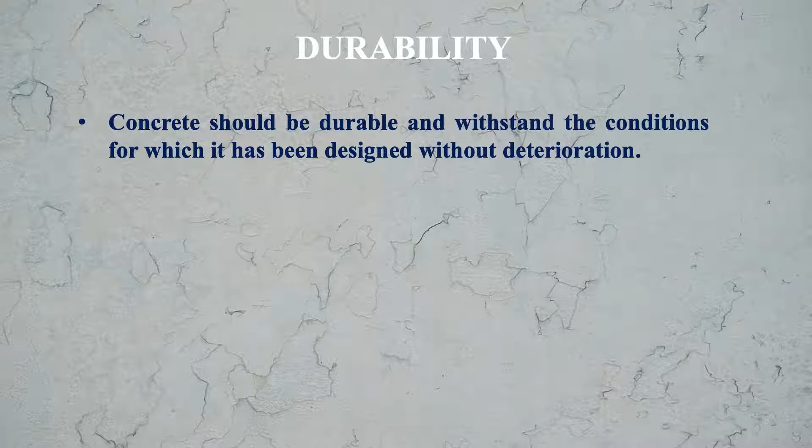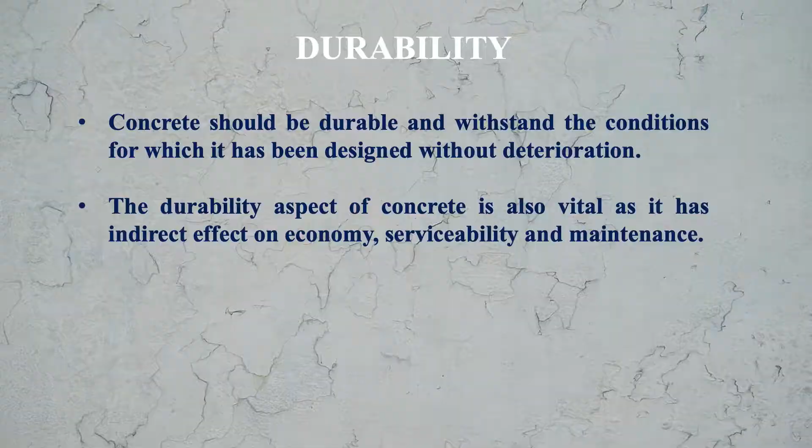what is the importance of durability. Concrete should be durable and withstand the conditions for which it has been designed without deterioration. The durability aspect of concrete is also vital, as it has an indirect effect on economy, serviceability and maintenance. So these are the reasons why the concrete we use for construction should be durable.

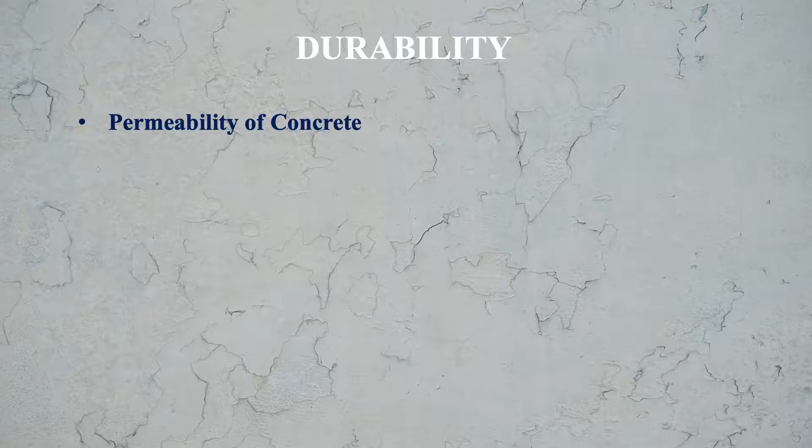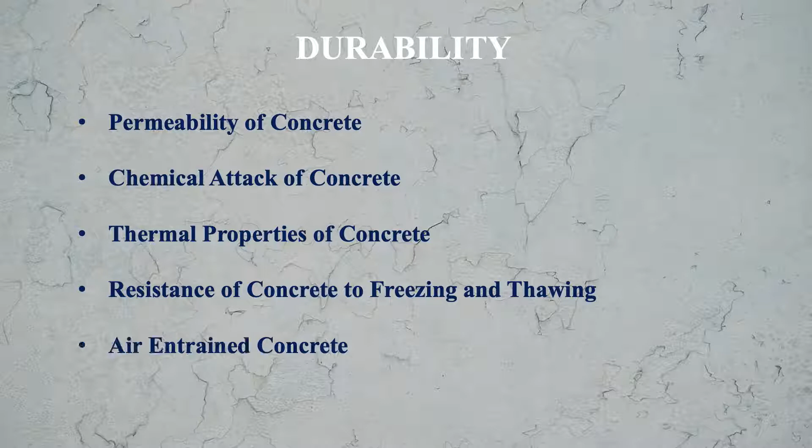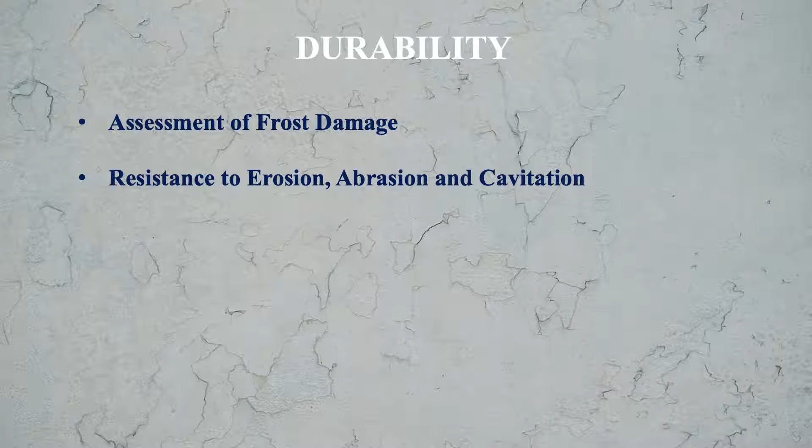We will learn about durability through the following factors: first is permeability of concrete, chemical attack on concrete, then thermal properties of concrete, then resistance of concrete to freezing and thawing, then air entrained concrete, assessment of frost damage, resistance to erosion, abrasion and cavitation, and cracks in concrete. So all these factors will decide how durable the concrete is.

Out of these, we will be focusing our discussion on the first three, that is permeability of concrete, chemical attack on concrete and thermal properties of concrete. So first of all, let us see what are the factors affecting the durability.

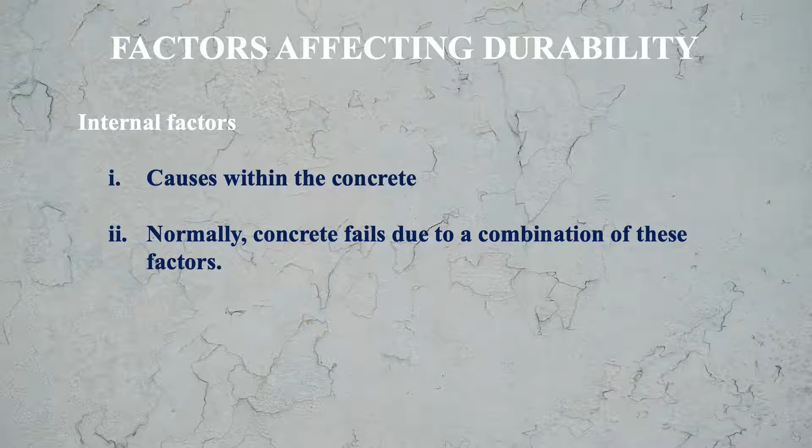There are external factors as well as internal factors. External factors means the environmental factors, and internal factors means those that cause deterioration within the concrete. Normally concrete fails due to a combination of these factors. Let us see what are the external factors or the environmental factors.

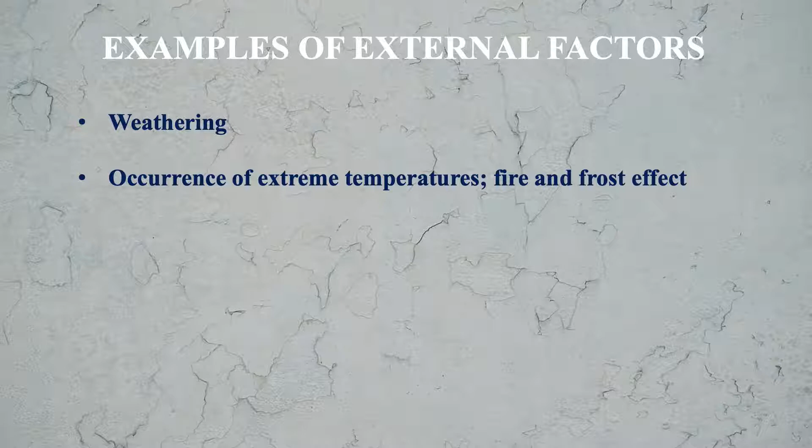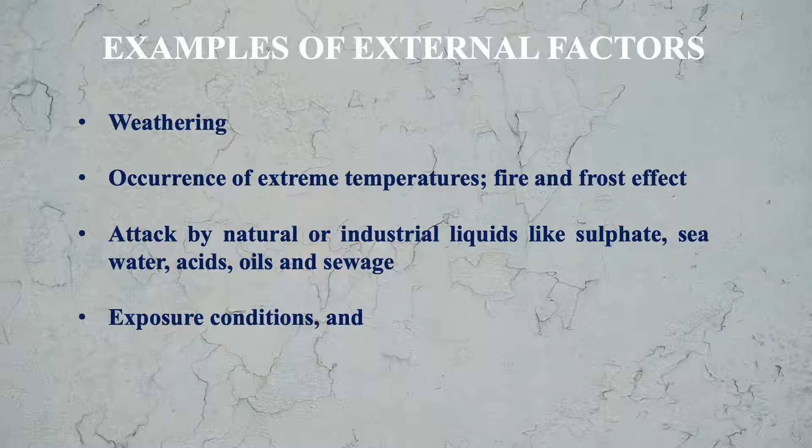External factors include physical factors, chemical factors and mechanical factors. Examples of external factors are weathering, occurrence of extreme temperatures, fire and frost effect, attack by natural or industrial liquids like sulfate, seawater, acids, oils and sewage, exposure conditions, and finally abrasion and cavitation. So these are the external factors affecting the durability of concrete.

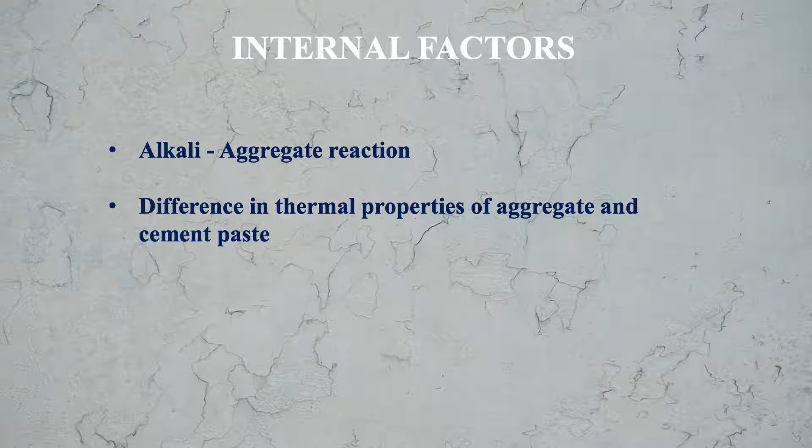As far as internal factors are concerned, these occur within the concrete, so we have to focus on what is occurring within the concrete, with no external agency playing any role. These internal factors are alkali aggregate reaction, difference in thermal properties of aggregate and cement paste, and permeability of concrete. So these are the three internal factors.

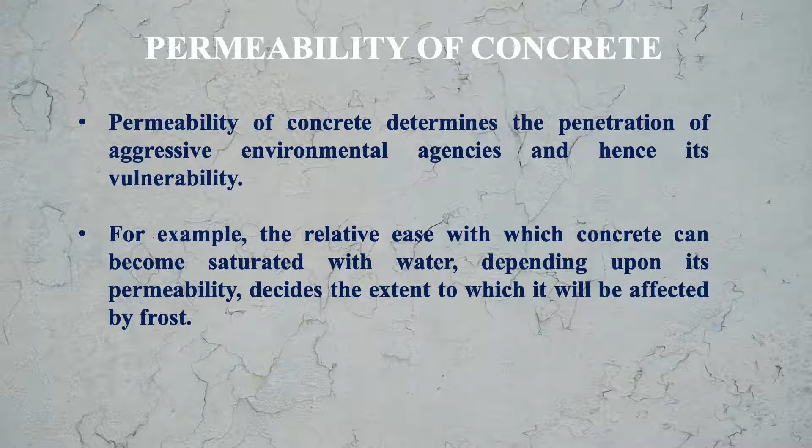Let us begin with permeability of concrete. Permeability of concrete determines the penetration of aggressive environmental agencies and hence its vulnerability to the aggressive environment. For example, the relative ease with which concrete can become saturated with water, depending upon its permeability, decides the extent to which it will be affected by frost.

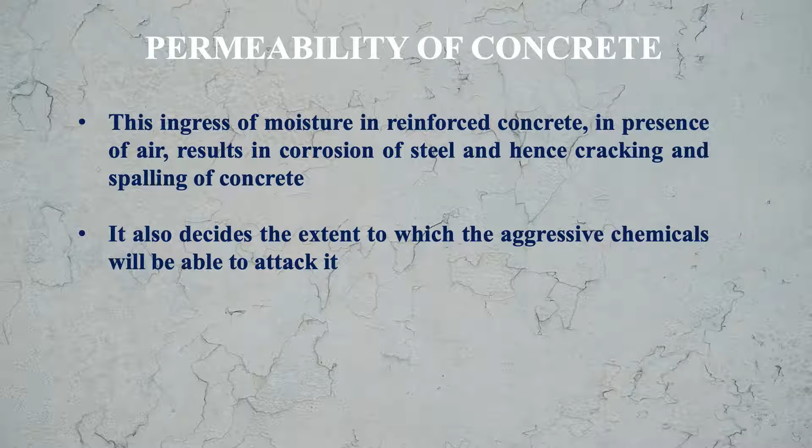This ingress of moisture in reinforced concrete in presence of air results in corrosion of steel and hence cracking and spalling of concrete occurs. It also decides the extent to which aggressive chemicals will be able to attack it. The permeability of concrete is also of great importance in relation to water tightness of liquid retaining structures, roofs and toilets which are in touch with moisture or water.

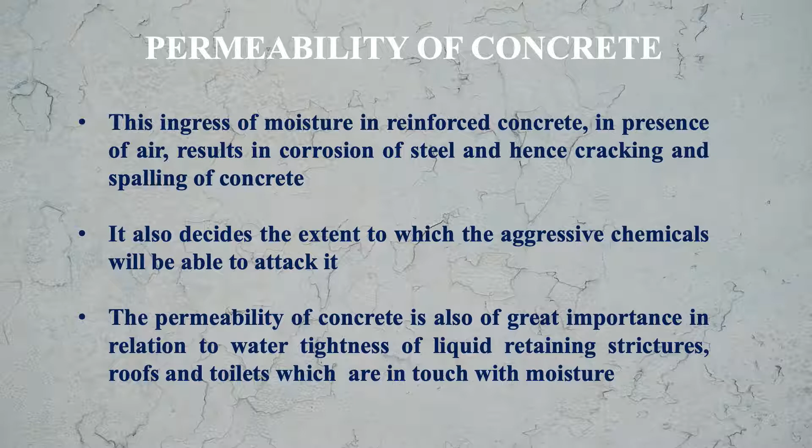Hydrated cement paste consists of gel pores and capillary cavities, meaning it has two types of voids. If we focus on gel, it has a porosity of 28.9%, but its pores are so small that an appreciable amount of water cannot pass through them. So gel pores do not contribute to the permeability of concrete.

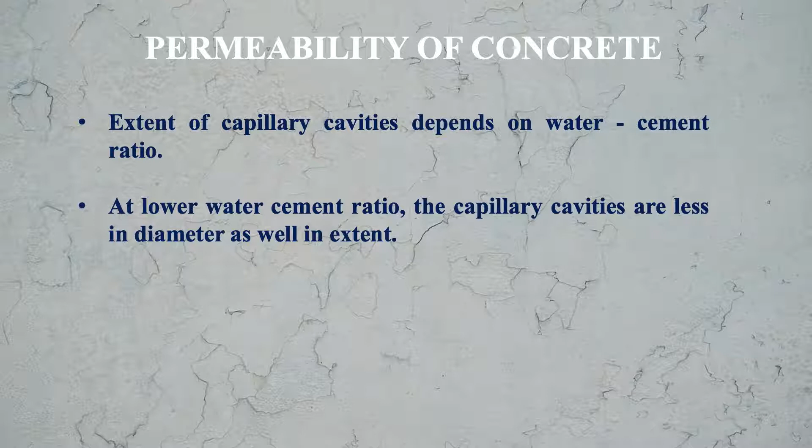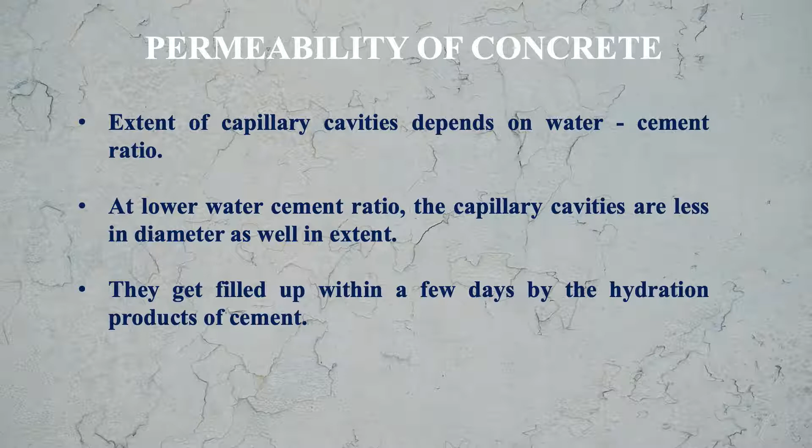The extent of capillary cavities depends on the water cement ratio. At lower water cement ratio, the capillary cavities are less in diameter as well as in extent, and they get filled up within a few days by the hydration products of cement. On the other hand, due to higher water cement ratio, meaning more than 0.7, large cavities are formed which gel is unable to fill, and they remain empty and are responsible for the permeability of concrete.

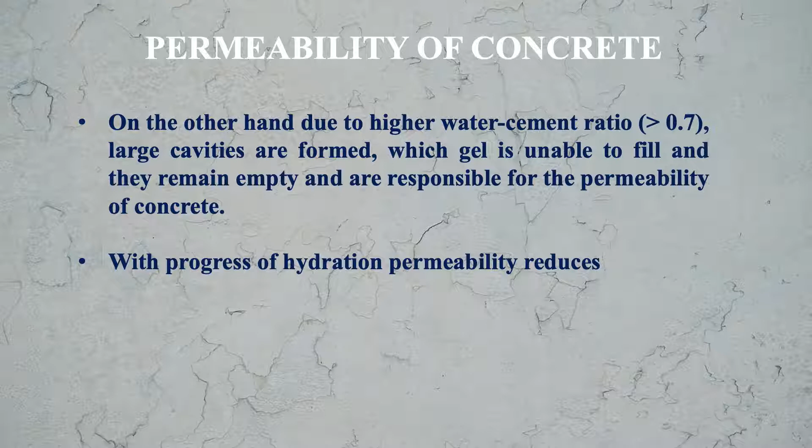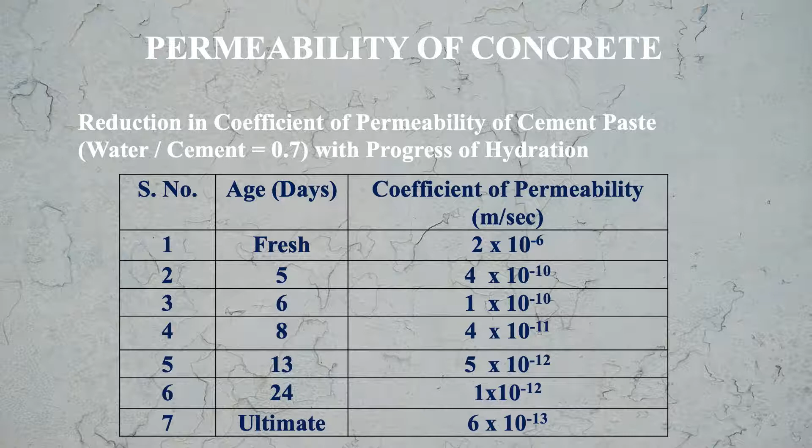The value of coefficient of permeability, as you saw, even at 8 days is 4 into 10 to the power minus 11 meter per second, and it is so small, comparable to a rock like granite — that is, physically no water will penetrate through it.

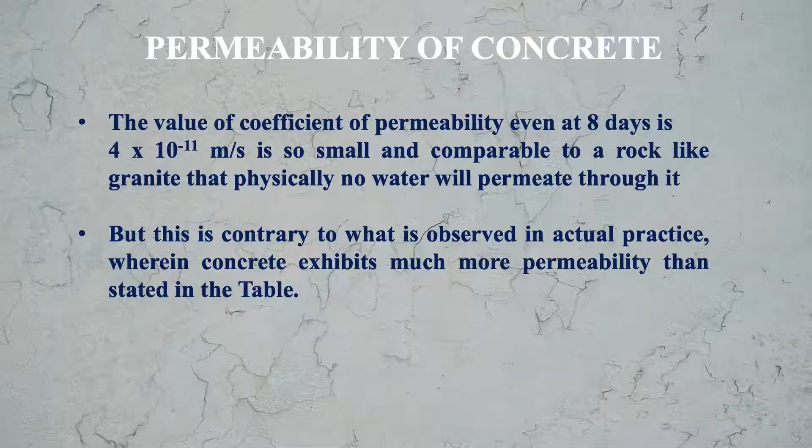But this is contrary to what is observed in actual practice. In actual practice, concrete exhibits much more permeability than stated in this table. So what are the reasons for that? We saw that with age the permeability is decreasing, and at 8 days it is almost comparable to the permeability of a rock like granite. So where is this permeability in the concrete coming from?

Let us see the causes of permeability. The causes of permeability include formation of micro cracks due to long-term drying shrinkage.

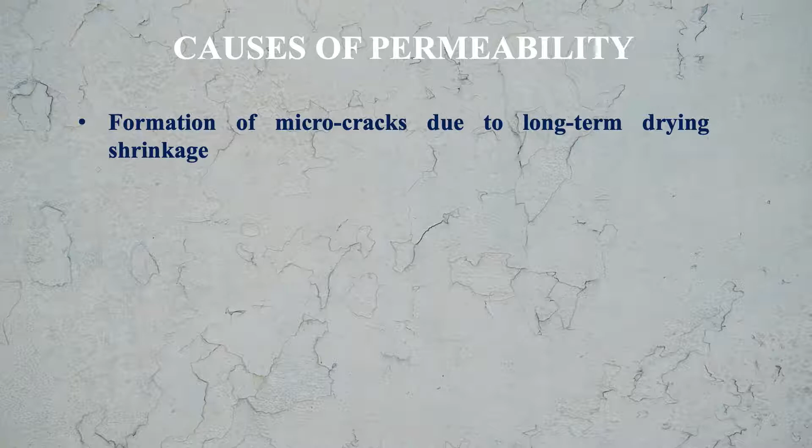Also, rupture of bond between the interface of paste and aggregate, due to differential thermal stresses, will cause permeability. Cracks developed on account of structural stresses will also cause permeability in concrete.

Entrapped air due to insufficient compaction also causes permeability, and volume change in concrete on account of various other reasons also causes permeability in concrete.

Now let us see the different methods for improving impermeability of concrete. One method is that we can use pozzolanic materials — the leaching of calcium hydroxide is prevented by this, and hence porosity is controlled when we use the pozzolanic material.

Second method is air entrainment up to 6%. If we do air entrainment in concrete up to 6%, we can control the impermeability, or improve the impermeability of the concrete.

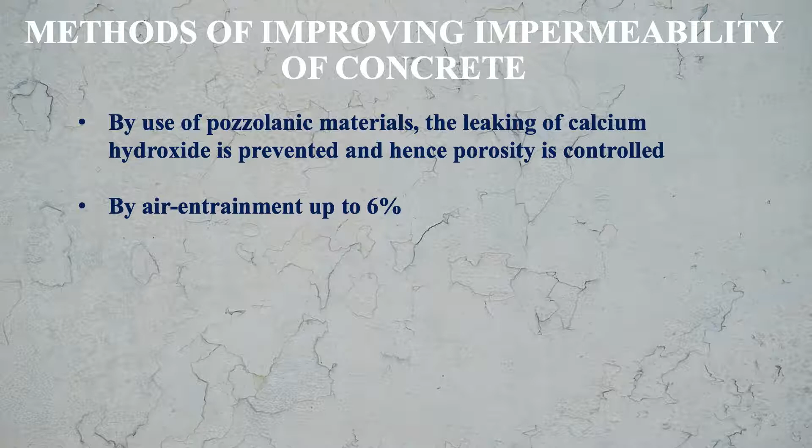Another method is high pressure steam cured concrete. This exhibits better impermeability due to coarser gel and hence lower drying shrinkage, so we can get good impermeable concrete.

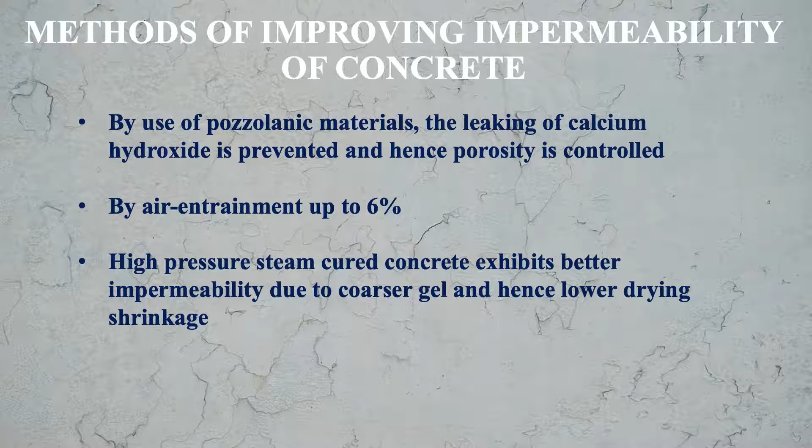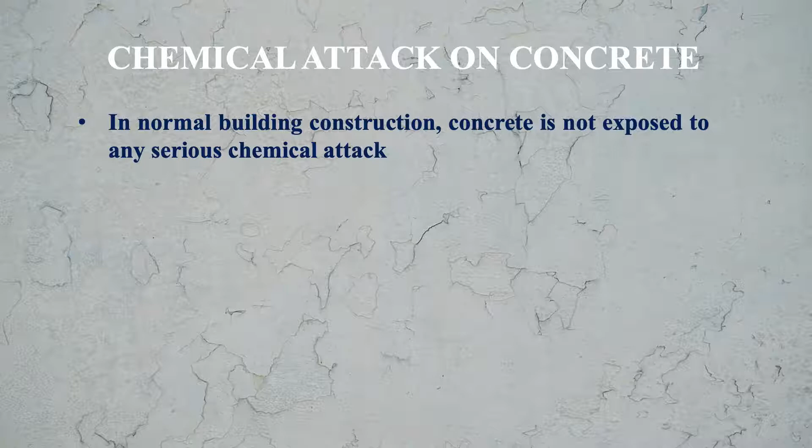Now let us see the chemical attack on concrete — how chemicals affect the durability of concrete. In normal building construction, concrete is not exposed to any serious chemical attack, considering general building construction.

But in certain special situations, concrete is exposed to chemical attack to different degrees, such as structures in sea, sulfate infested soils, tanneries where leather work is done, and industries producing, handling and storing chemicals. So in these situations, concrete is exposed to chemical attack.

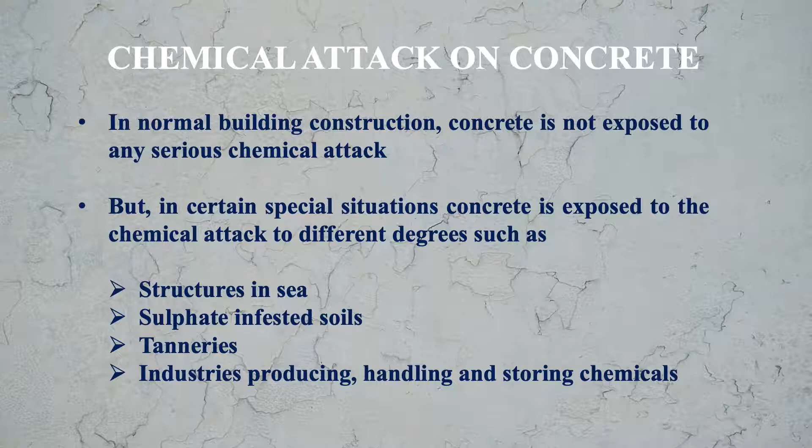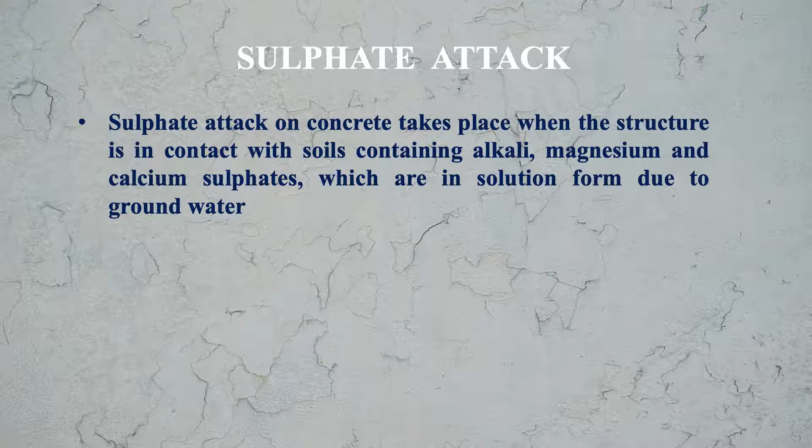Out of different chemical attacks, let us first consider the sulfate attack. Sulfate attack on concrete takes place when the structure is in contact with soils containing alkali, magnesium and calcium sulfates, which are in solution form due to groundwater.

When these chemicals come in contact with groundwater, they form a solution of these chemicals, and due to this, our concrete is affected.

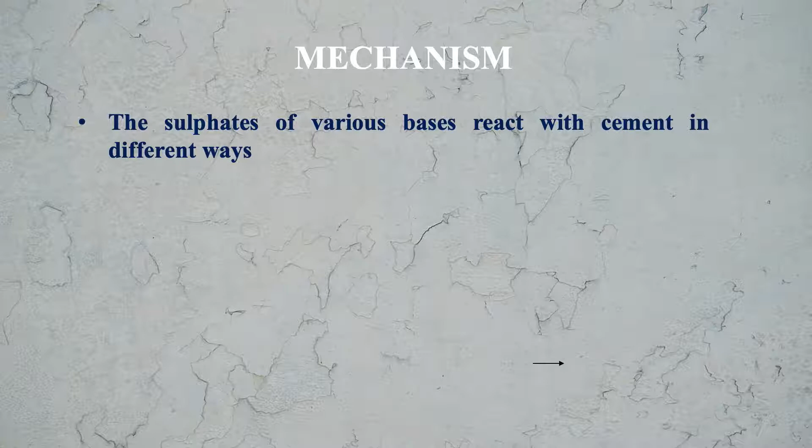So let us understand the mechanism of sulfate attack. The sulfates of various bases react with cement in different ways. Sodium, potassium and ammonium sulfates first react with calcium hydroxide to form gypsum, which in turn reacts with hydrated calcium aluminates to form calcium sulfoaluminate.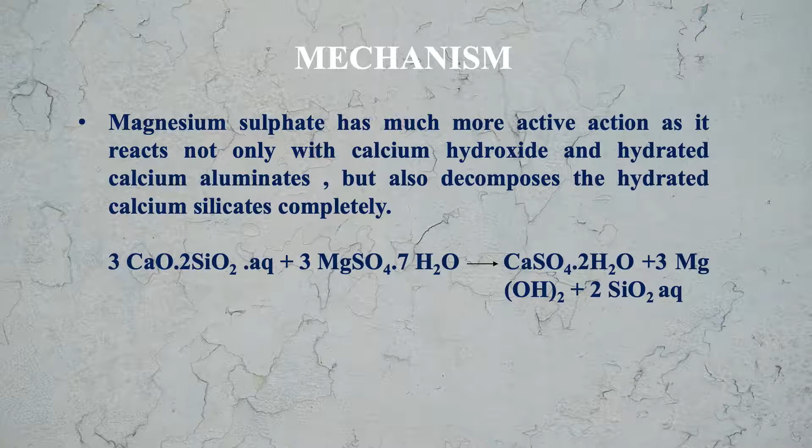So that way you see that by the attack of these sulfates, the hydrated components of the cement are changing their chemical nature. Because of that, deterioration is taking place.

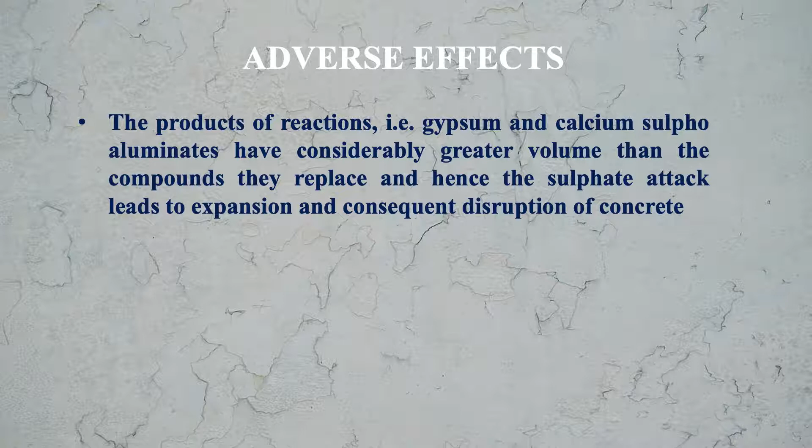Now let us see the adverse effects of the sulfate attack. The products of reaction, that is gypsum and calcium sulfoaluminates, have considerably greater volume than the compounds they replace, and hence sulfate attack leads to expansion in the concrete, and consequently disruption or deterioration of concrete occurs.

In case of magnesium sulfate, because of the very low solubility of magnesium hydroxide, the reaction proceeds to completion and hence is very severe compared to other sulfate attacks. The effect of magnesium sulfate is more severe in comparison to other sulfate attacks.

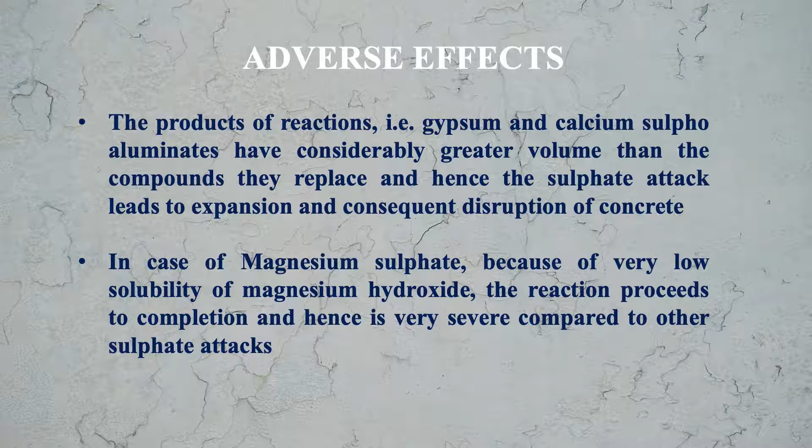Also, the rate of sulfate attack increases with the increase in the strength of the solution. As the strength of the solution of these sulfate compounds increases, the attack on the concrete will increase.

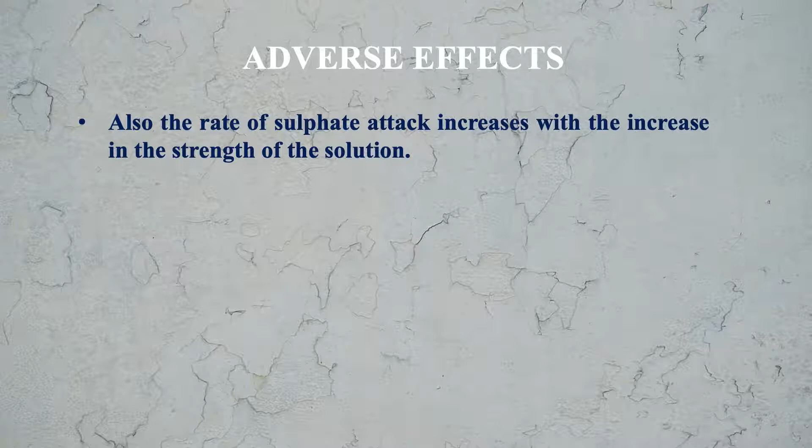A saturated solution of magnesium sulfate can cause serious damage to concrete with higher water cement ratio in a relatively short time, while lower water cement ratio concrete can withstand this attack for 2 to 3 years. So that is the effect of water cement ratio: at higher water cement ratio, it attacks more quickly compared to when the water cement ratio is low.

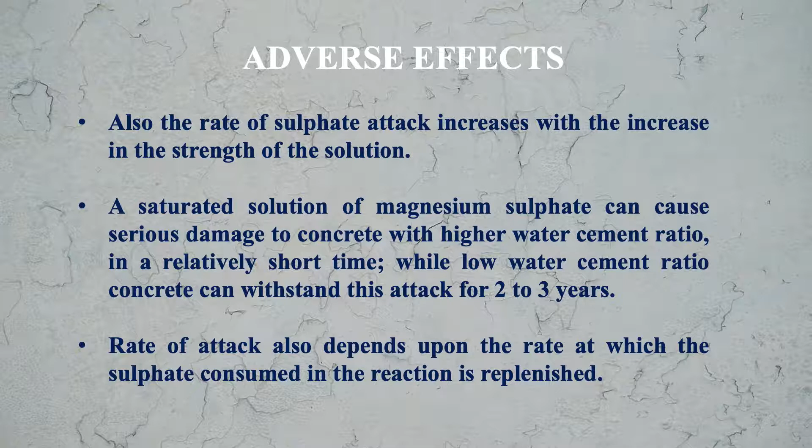The rate of attack also depends upon the rate at which the sulfate consumed in the reaction is replenished. If the sulfate consumed in the reaction is being replenished, then the rate of attack will be more. If it is being replenished slowly, the attack of sulfate will be slow.

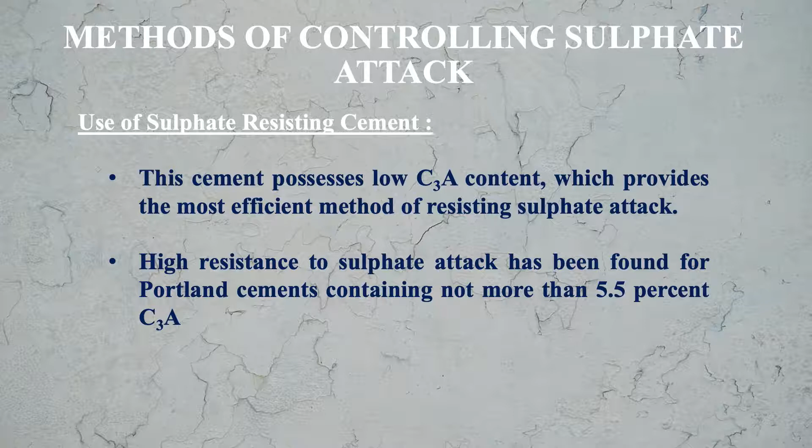So let us see how we can control the sulfate attack. There are different methods. First, we can control it by using sulfate resisting cement. This cement possesses low C3A content, tricalcium aluminate, which provides the most efficient method of resisting sulfate attack. High resistance to sulfate attack has been found for Portland cements containing not more than 5.5% of C3A.

We can also control the sulfate attack by using quality concrete. If we use well-designed, mixed, placed and compacted concrete, we get a dense concrete, and this concrete will be impermeable, and would exhibit higher resistance to sulfate attack. For getting a dense concrete, the concrete must have a low water cement ratio. So by using quality concrete, we can check the sulfate attack on the concrete.

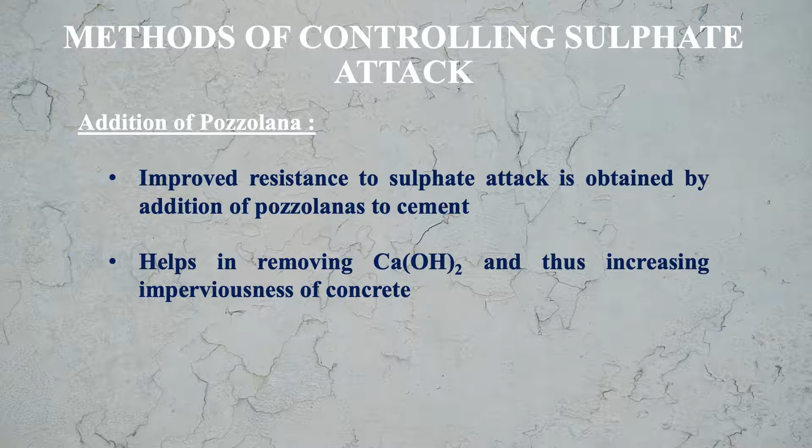We can improve the resistance to sulfate attack of concrete by adding pozzolanic material. Using pozzolanic material gives improved resistance to sulfate attack, obtained by addition of pozzolanas to the cement. This helps in removing calcium hydroxide and thus increasing imperviousness of concrete.

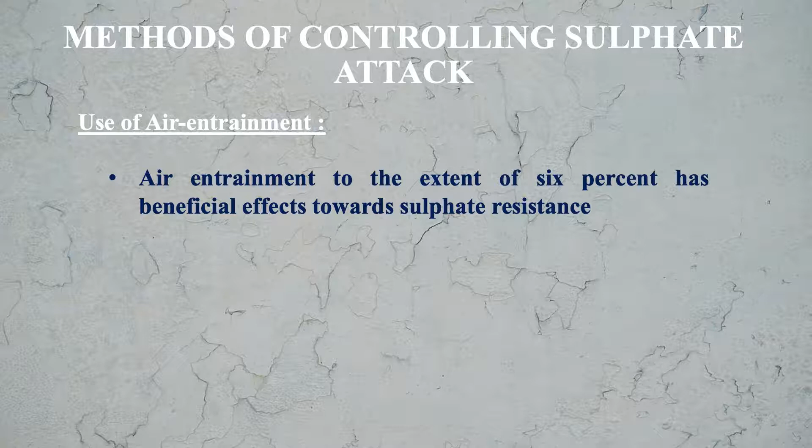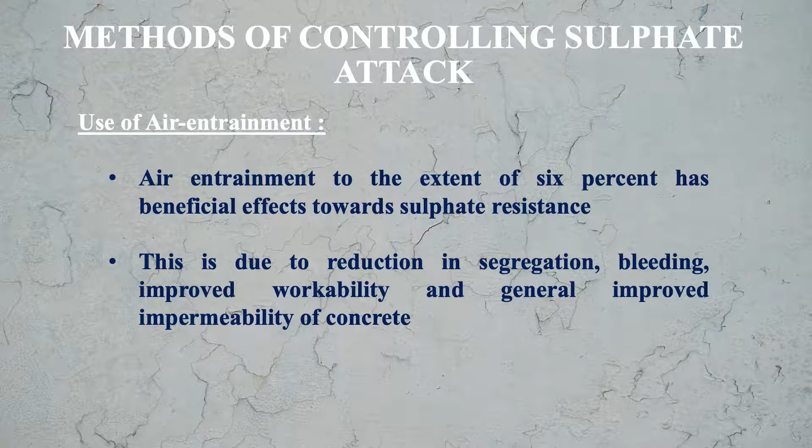Also, we can use the air entrainment method. Air entrainment to the extent of 6% has beneficial effects towards sulfate resistance. This is due to reduction in segregation, bleeding, improved workability, and general improved impermeability of the concrete. Because of the improvement in these properties, air entrainment helps us increase the resistance of concrete to sulfate attack.

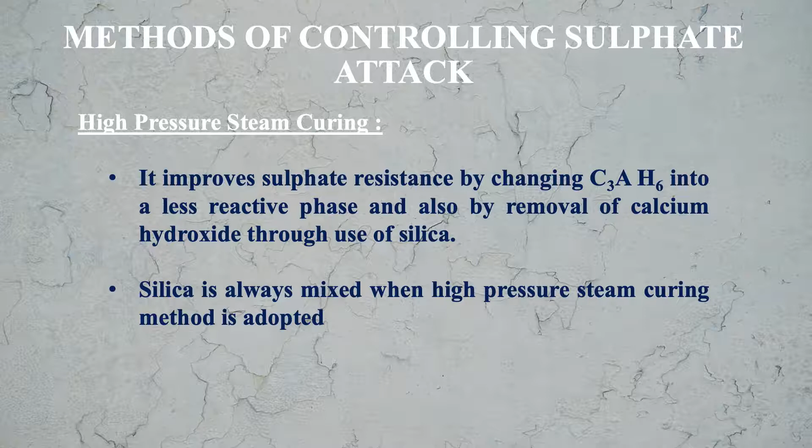Another way is high pressure steam curing. High pressure steam curing improves sulfate resistance by changing C3AH6 into a less reactive phase, and also by removal of calcium hydroxide through use of silica. Silica is always mixed when high pressure steam curing method is adopted. So that way, high pressure steam curing helps us improve the resistance of concrete to sulfate attack.

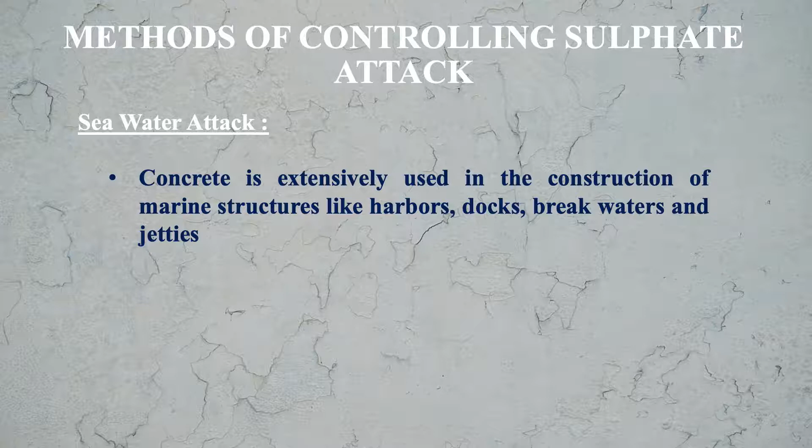Now let us see the effect of seawater attack on concrete. Concrete is extensively used in construction of marine structures like harbors, docks, breakwaters, and jetties. The concrete in seawater environment may suffer due to attack of dissolved chemicals on the products of hydration, and crystallization of salts within the concrete under conditions of alternate wetting and drying. Due to alternate wetting and drying, crystallization of salts within the concrete is affected.

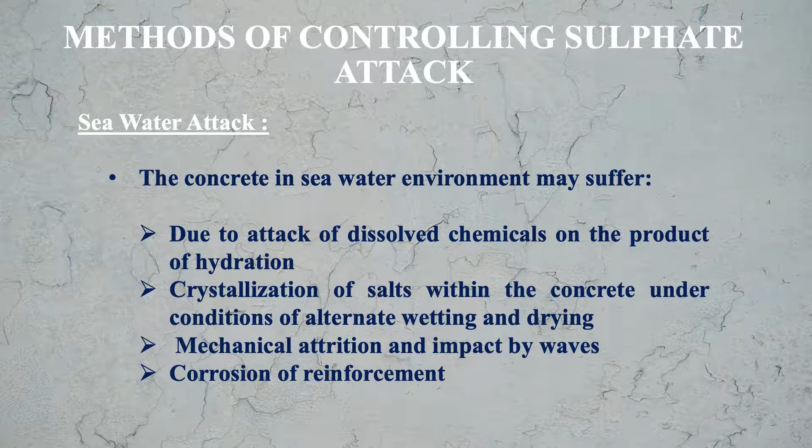Mechanical attrition and impact by waves occur because waves are always hitting the concrete, causing impact load on the concrete. Then due to seawater, corrosion of reinforcement may occur. So these are the effects.

Seawater attack consists of expansion due to sulfates and leaching due to chlorides in seawater. These affect the concrete causing expansion. The most severe attack in seawater occurs just above the level of high water due to crystallization of salts.

So we are seeing here at what level the concrete is being affected and in what way. First we consider the concrete above the level of high water, meaning when waves are high. Above this level, it is going to attack more severely.

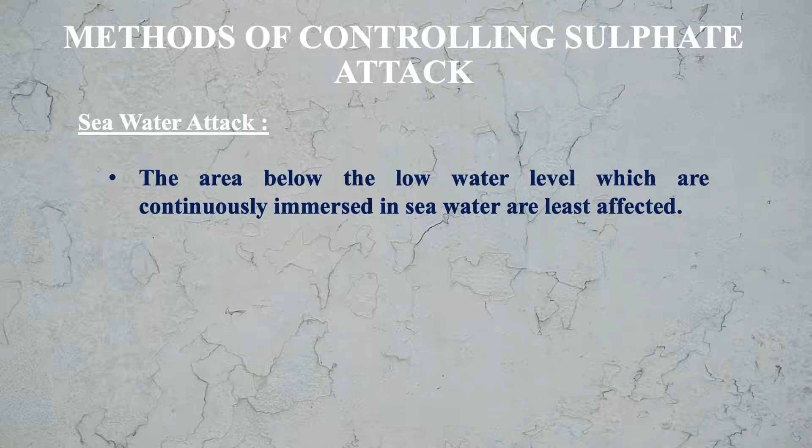Then the portion between the low and high water marks is less affected. But the area below the low water level, which is continuously immersed in seawater, is least affected. So that way you see the different types of effect at different levels of the concrete.

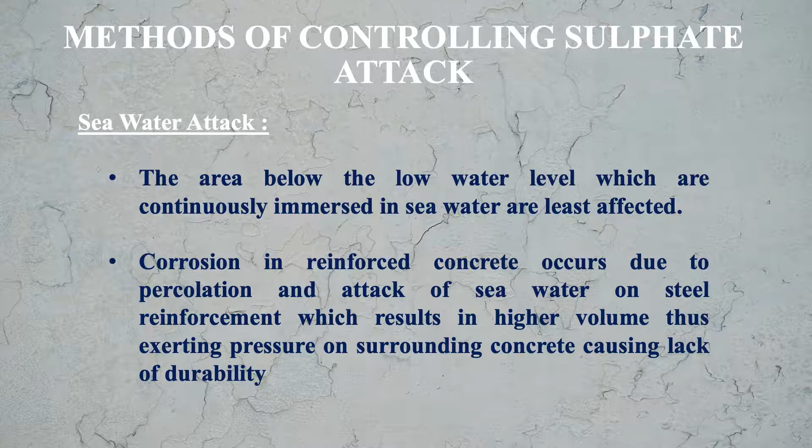Corrosion in reinforced concrete occurs due to percolation and attack of seawater on steel reinforcement, which results in higher volume, thus exerting pressure on surrounding concrete, causing lack of durability. This means durability of concrete goes down because of rusting. On rusting, the volume of reinforcement increases, and due to this higher volume, it exerts pressure on the surrounding concrete.

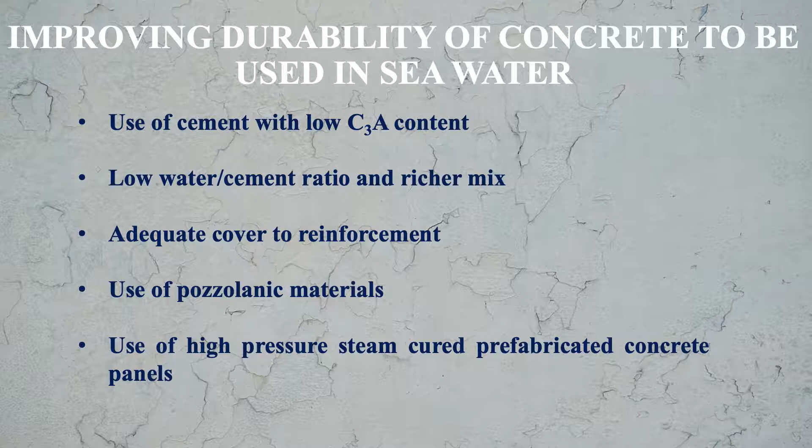Let us see how we can improve the durability of concrete used in seawater. We can do it by using cement with low C3A content, low water cement ratio, and a richer mix. Adequate cover to reinforcement should be given. We can use pozzolanic materials, and also high pressure steam curing for prefabricated concrete panels. By adopting these methods, we can improve the durability of concrete used in seawater.

Now let us see the effect of oils and acids attack. Let us first consider the action of mineral oils. Mineral oils like petrol and petroleum distillates seriously affect the hardening process of fresh concrete but do not attack it.

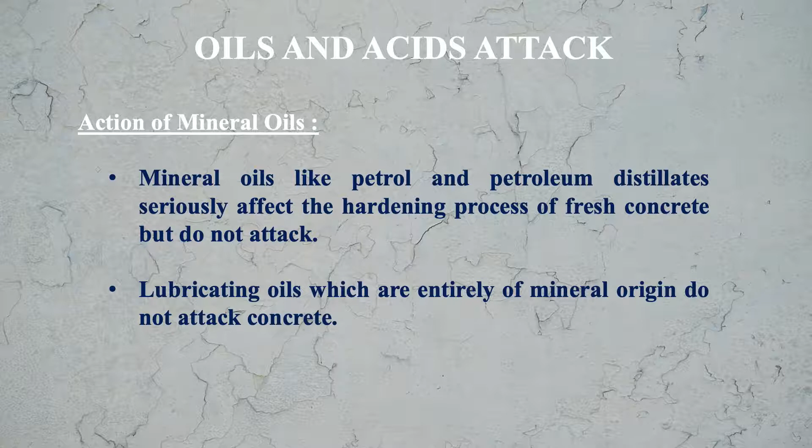Lubricating oils, which are entirely of mineral origin, do not attack concrete. Creosotes, which contain phenols, may have some adverse effects on concrete. Durability of concrete tanks used for storage of mineral oils is improved through improvement of imperviousness of concrete by using

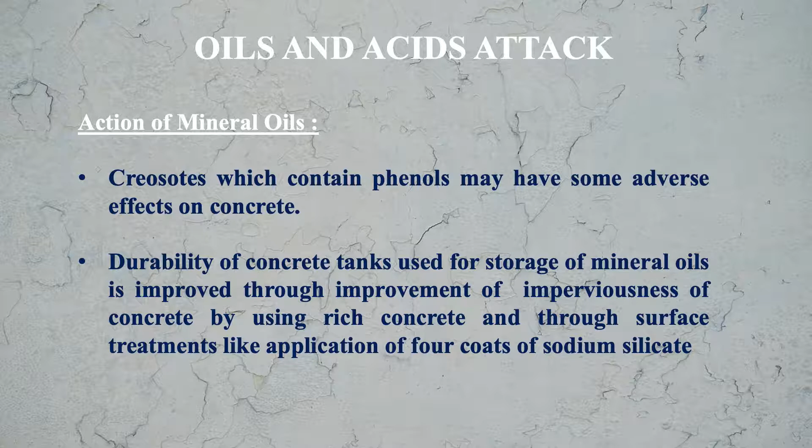rich concrete and through surface treatments like application of 4 coats of sodium silicate. So by applying sodium silicate in 4 coats, we can increase the resistance of concrete to mineral oils.

Now let us see the action of organic acids on concrete. The action of organic acids on concrete is corrosive. While formic acid is more corrosive, tannic acid and phenols are only mildly corrosive.

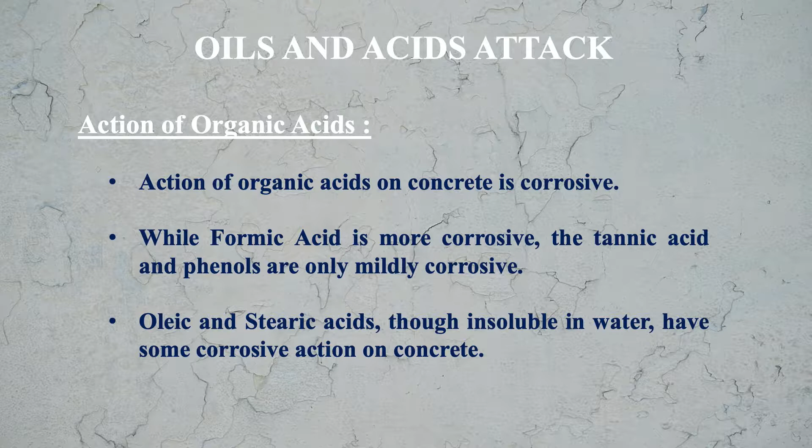Oleic and stearic acids, though insoluble in water, have some corrosive action on concrete. In case of acetic acid, lactic acid, and butyric acid, the severity of attack depends upon their concentration and temperature.

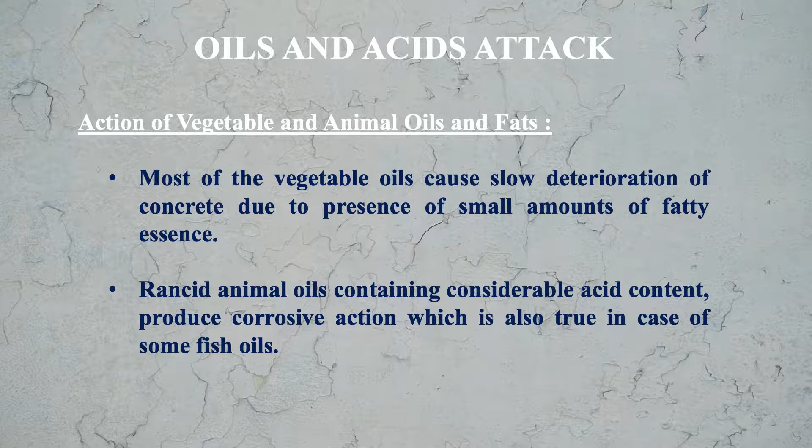Now let us see the action of vegetable and animal oils and fats. Most vegetable oils cause slow deterioration of concrete due to the presence of a small amount of fatty acids. Rancid animal oils containing considerable acid content produce corrosive action, which is also true in case of some fish oils. The similar effect is seen in case of fish oils.

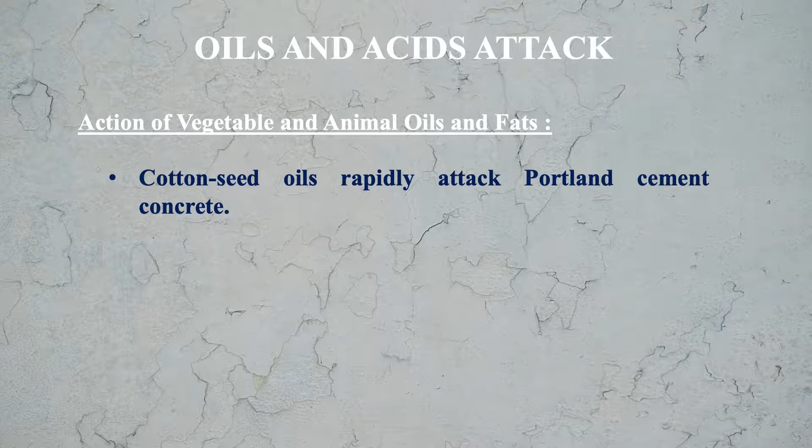Cottonseed oils rapidly attack Portland cement concrete. This is important: cottonseed oil rapidly attacks Portland cement concrete.

Now let us see the action of molasses. Concrete tanks are used satisfactorily for storage of molasses, which indicates that the action of their sugar content is not of much consequence, though it causes gradual corrosion.

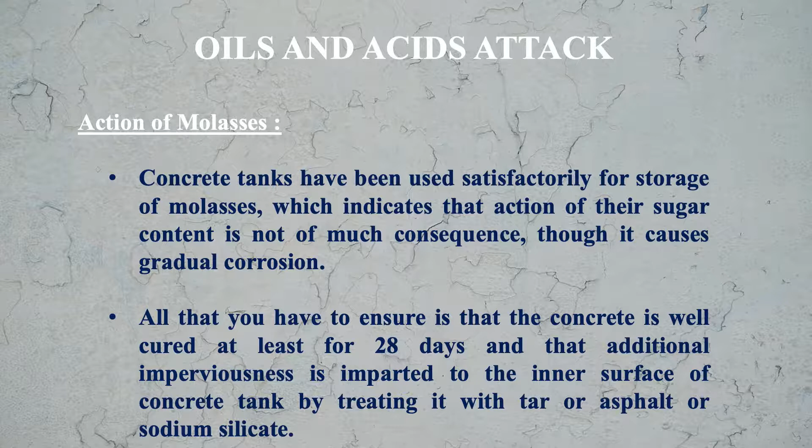All you have to ensure is that the concrete is well cured for at least 28 days, and that additional imperviousness is imparted to the inner surface of the concrete tank by treating it with tar, asphalt, or sodium silicate. This method can be used for making concrete resistant to the action of molasses.

Let us see the action of sewage on concrete. If sewage contains more than 150 ppm of soluble sulfate salts, sulfate attack may occur. But domestic sewage rarely contains this amount of sulfate salts and hence is not detrimental.

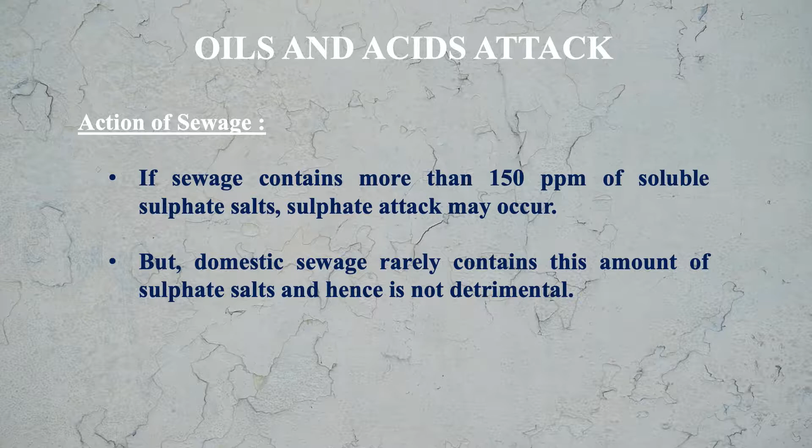However, hydrogen sulfide gas emanating from the sludge digestion tank can promote the formation of sulfuric acid, which can attack the concrete surface above the liquid level. So the concrete above the liquid level can be affected by this sulfuric acid, which is formed in the sludge digestion tanks.

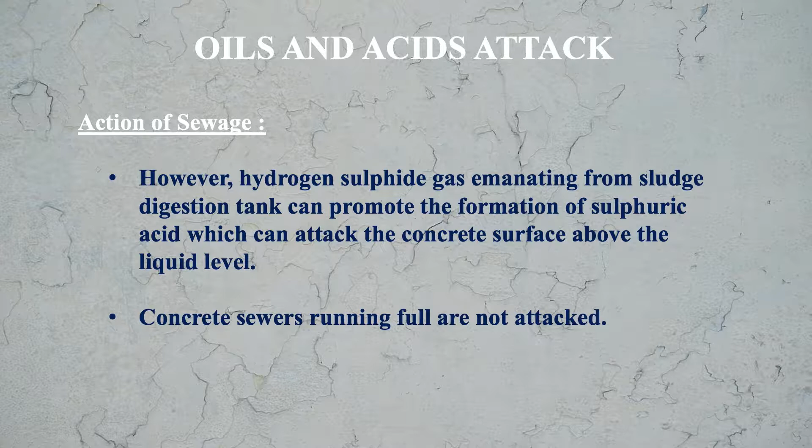Concrete sewers running full are not attacked. Certain industrial wastes containing higher concentration of sulfates are injurious to the durability of concrete.

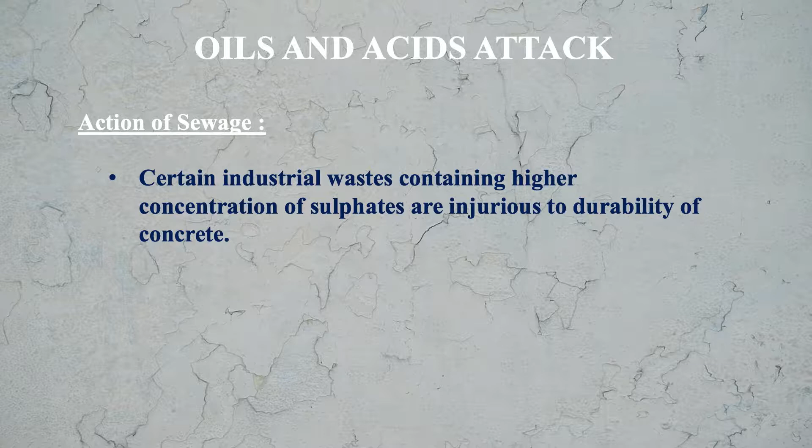Concrete pipes used for sewage are made from well compacted rich concrete of low water cement ratio, so that they remain unaffected for a long time. The formation of sulfuric acid can be avoided by ensuring sufficient flow of sewage, proper ventilation of sewers, and by avoiding stagnation of sewage. If we follow these three methods, we can avoid the formation of sulfuric acid.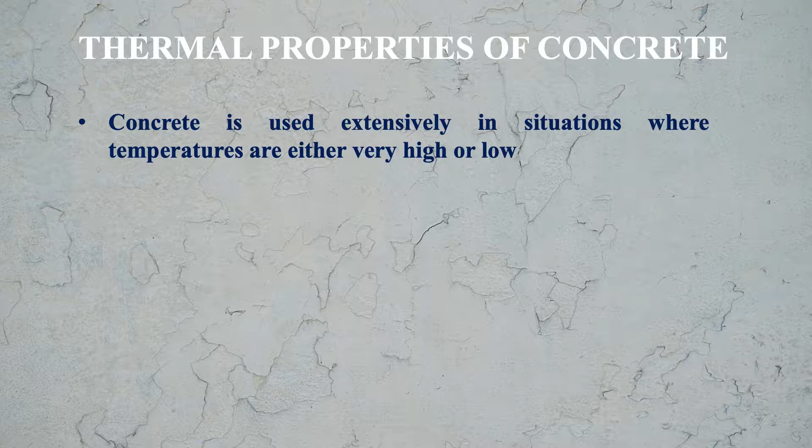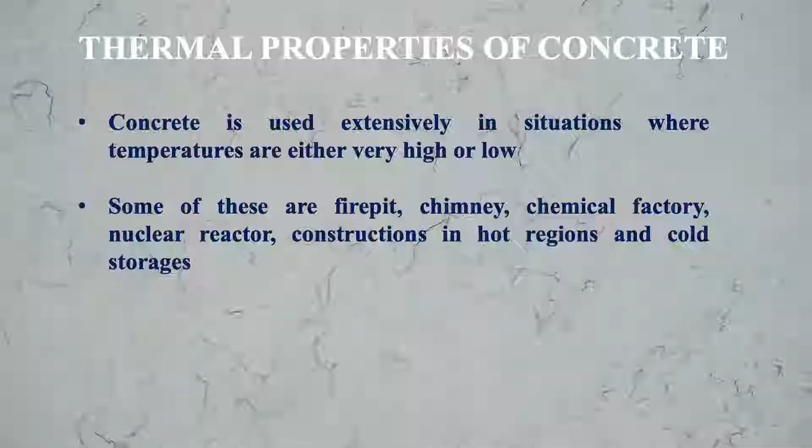Now let us see the thermal properties of concrete. Concrete is used extensively in situations where temperatures are either very high or very low. Some of these are fire pits, chimneys, chemical factories, nuclear reactors, construction in hot regions, and construction for cold storages. These are the situations where concrete faces either very high or very low temperature.

Thermal behavior of concrete in these situations gives us a good understanding of durability of concrete. So we should understand how the variation of temperature affects the quality of concrete. Let us see the thermal conductivity of concrete.

The ability of concrete to conduct heat is indicated by its thermal conductivity. It is measured in joules per second per square meter of area of concrete, when the temperature difference is 1 degree centigrade per meter thickness of the concrete.

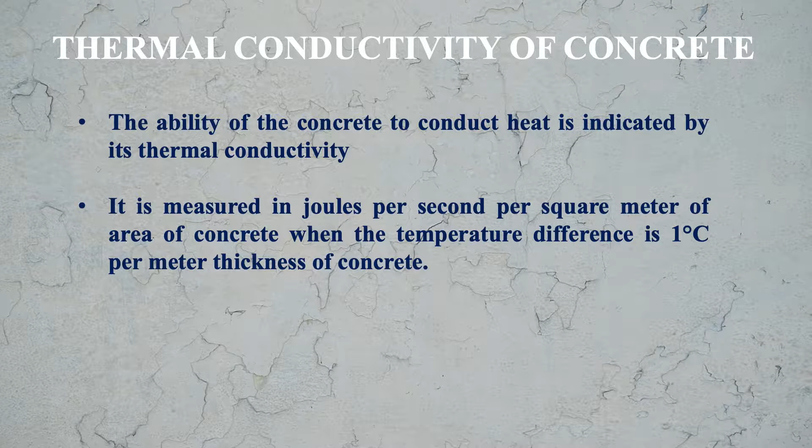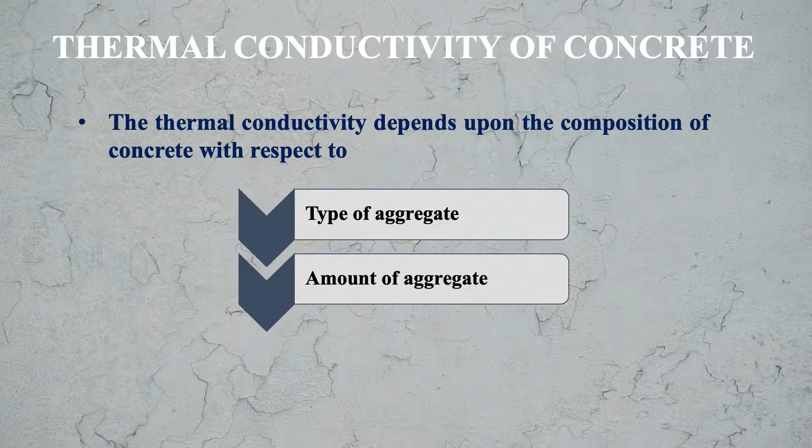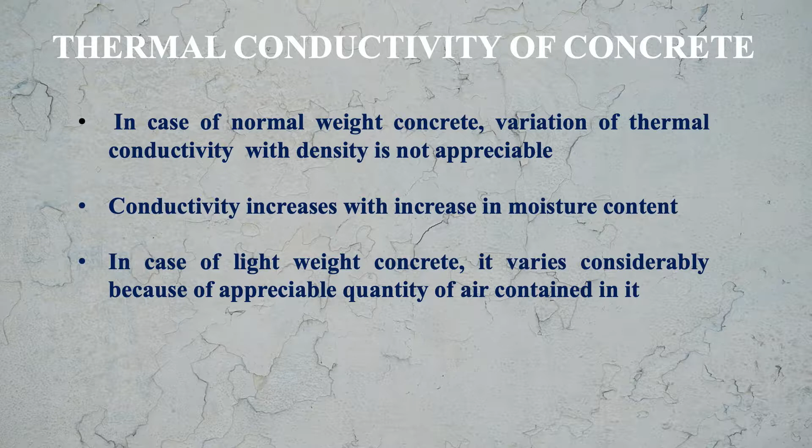The thermal conductivity depends upon the composition of concrete with respect to type of aggregate, amount of aggregate, and moisture content. In case of normal weight concrete, variation of thermal conductivity with density is not appreciable. But in case of lightweight concrete, it varies considerably because of the appreciable quantity of air contained in it.

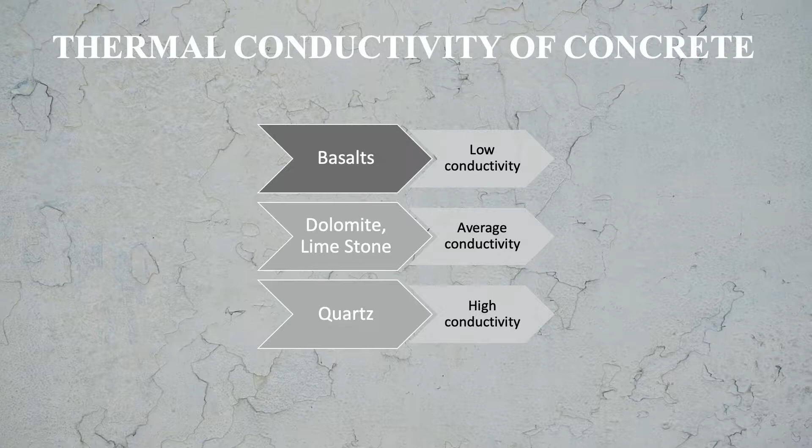If we look at the conductivity of different materials, basalt possesses low conductivity, dolomite and limestone possess average conductivity, and quartz possesses high thermal conductivity. Conductivity increases with increase in moisture content.

Now let us see the coefficient of thermal expansion. Too much thermal incompatibility between aggregate and paste causes differential expansion and contraction, resulting in disruption of the interface bond between these two phases. This means the bond between the aggregate and the paste is affected because of the difference in the coefficient of thermal expansion of the aggregate and the cement paste.

Hence it affects the durability of the concrete, because if there is a differential change or difference in thermal coefficient of the ingredients of the concrete, then certainly the durability of concrete will be affected. Thermal coefficient increases with increase in water cement ratio and varies with the type of aggregate used. So these are the two factors: water cement ratio and the type of aggregate.

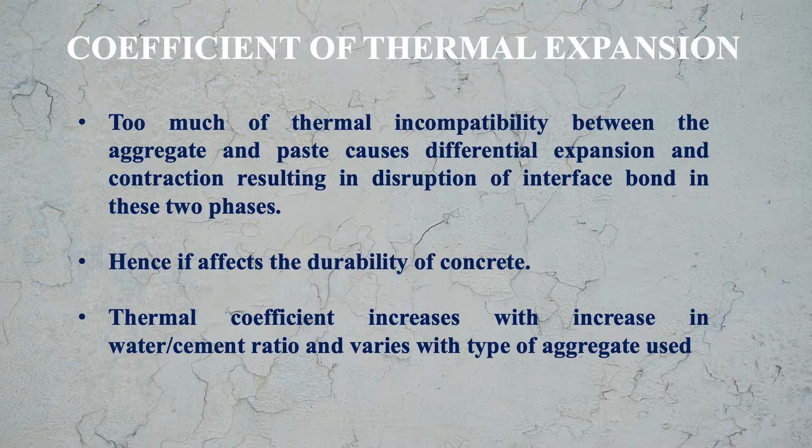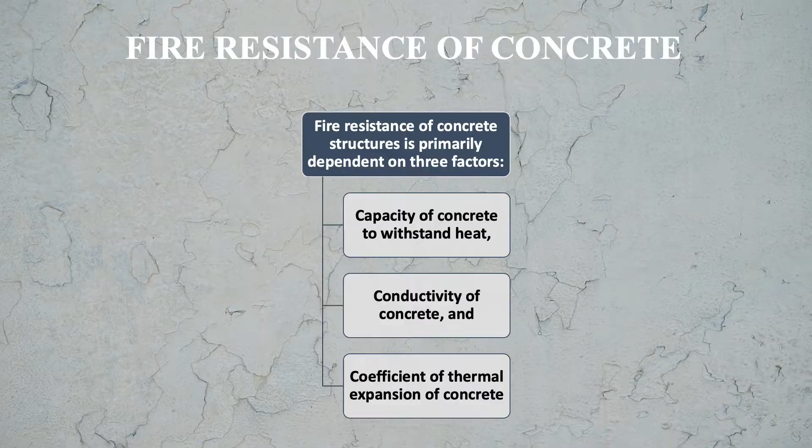Now let us see the fire resistance of concrete. Fire resistance of concrete structures is primarily dependent on three factors: capacity of concrete to withstand heat, conductivity of concrete, and coefficient of thermal expansion of concrete. These are the three factors which primarily control the fire resistance of concrete structures.

In case of reinforced concrete, type of concrete and cover to reinforcement play a major role. So we have to focus on these two things: what type of concrete we are using, and proper cover to the reinforcement.

High temperature gradient causes differential expansion and separation between the surface and the interior. This means if there is a high temperature gradient, differential expansion occurs and separation of the surface and interior may occur. Heating of reinforcement and the consequent expansion causes loss of bond and loss of strength of reinforcement.

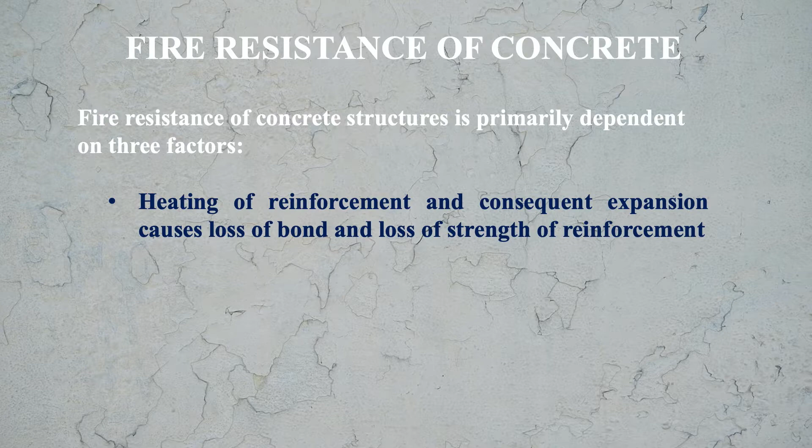So bond as well as the strength of reinforcement is affected by heat. The best fire resistant aggregates are basalt, dolerites, dense limestone and blast furnace slag aggregate, and also broken bricks can be used.

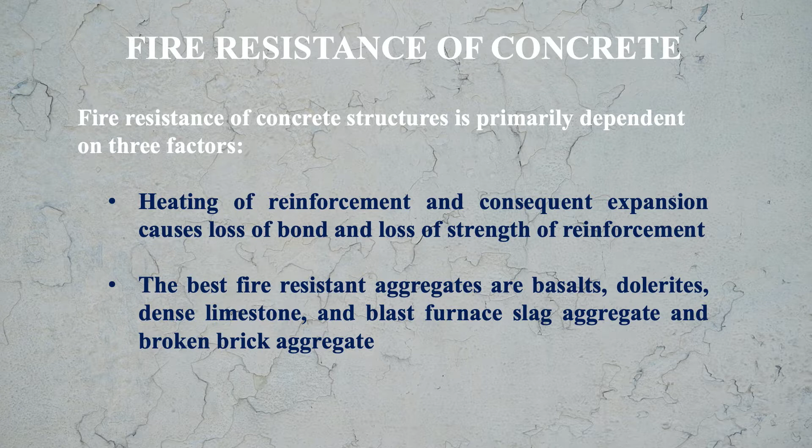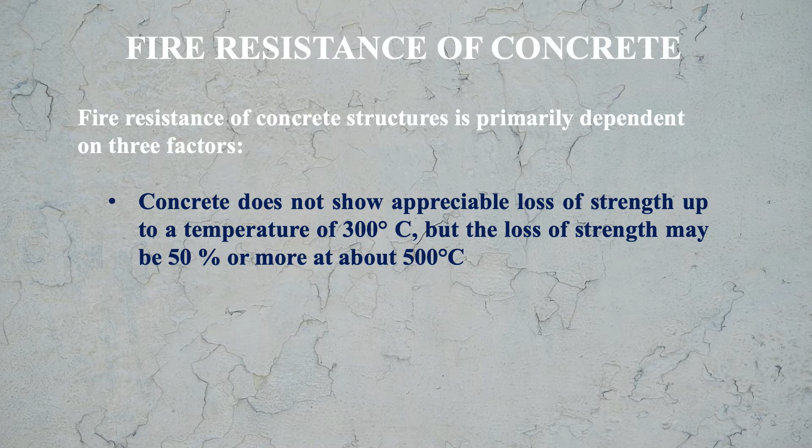Concrete does not show appreciable loss of strength up to a temperature of 300 degrees centigrade, but the loss of strength may be 50% or more at about 500 degrees centigrade. So up to 300 degrees centigrade there is not much effect, but at 500 degrees centigrade you see loss of strength up to 50% or more.

So this way we have discussed durability, how it is affected by various factors, external as well as internal. This way we have understood durability. Thank you for watching.